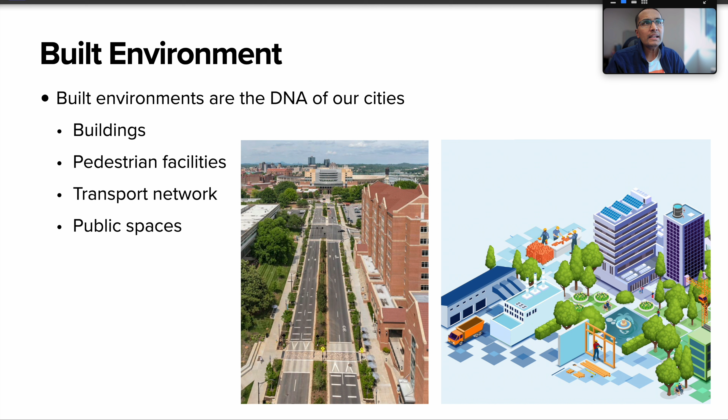They have things like buildings, pedestrian facilities like sidewalks and crosswalks, transportation networks where people switch modes from commuting via foot to getting on a bus or things like that. And in terms of the problem that we're looking at, I'd like to think of this as a multi-stakeholder perspective. There are multiple stakeholders in a built environment, primarily vehicles, pedestrians, and designers and planners.

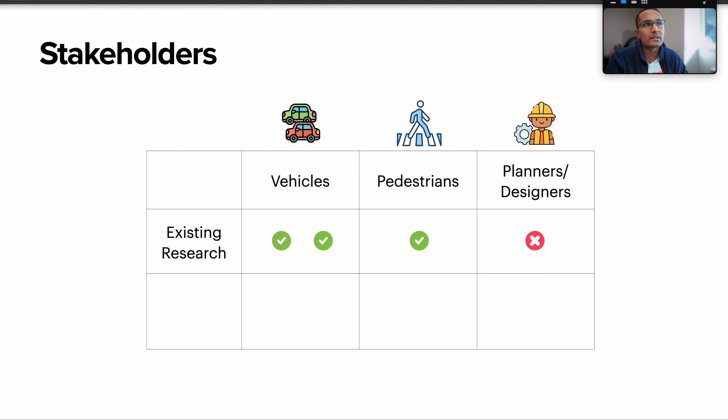If we look at any transportation or even optimization venues, we'll see that existing work mostly focuses on research towards one particular stakeholder, that is vehicles. Every now and then we'll see some work trying to address the problems or optimizations related to pedestrians, whereas it's really hard to find any kind of comprehensive study that targets planners and designers, which are also an important part of the stakeholders in a built environment.

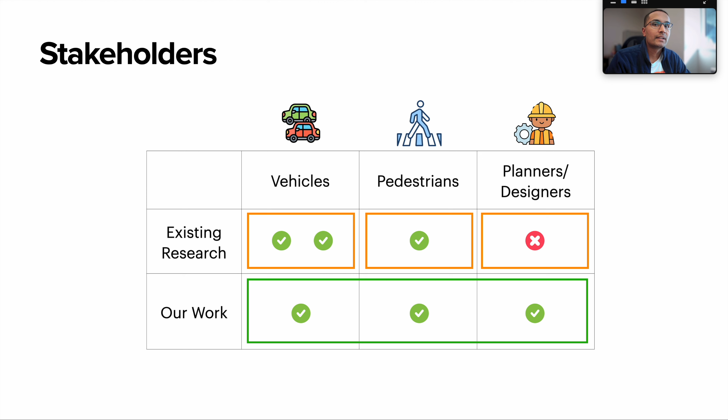The other thing that we observe is that most of the frameworks that exist out there address them independently, as in they are not unified in addressing all the stakeholders in a built environment. What we are trying to do here is address all possible stakeholders in our framework in a unified manner, which does not exist so far. That's our motivation for this work.

In order to better understand how they have different objectives, and those objectives might often be competing, we have to understand how the design and control aspects related to various stakeholders interact, and what the trade-offs are. This is also a motivation behind why we feel the necessity of optimizing these things.

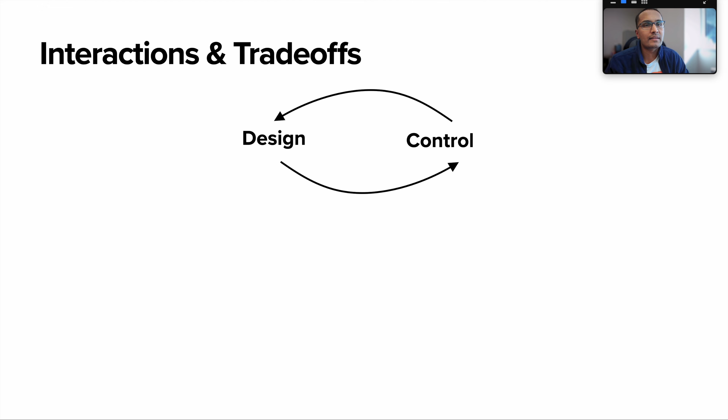So the ideal solution here is to build something like a mid-block crosswalk that would minimize the travel time for the pedestrian, but it would increase the cost of initially building that crosswalk as well as later maintaining it. And in the previous scenario, where the pedestrians had to go all the way to the intersection, it not only increases the travel time of vehicles traveling east-west, because the pedestrians now have to cross, it also affects the travel time of the vehicles going north-south, because now they have to accommodate that pedestrian crossing.

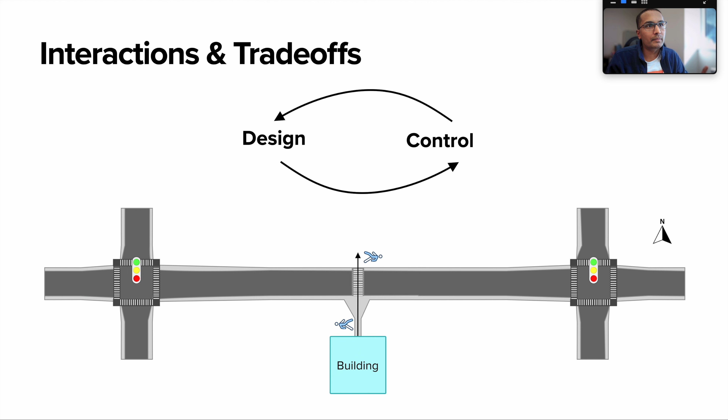Whereas in this setup, although the travel time for pedestrians is reduced, the vehicles now have to make more stops when going from one intersection to the other. So this kind of built environment is inherently an environment with multiple interactions and multiple trade-offs related to both design and control, and these originate from various different stakeholders.

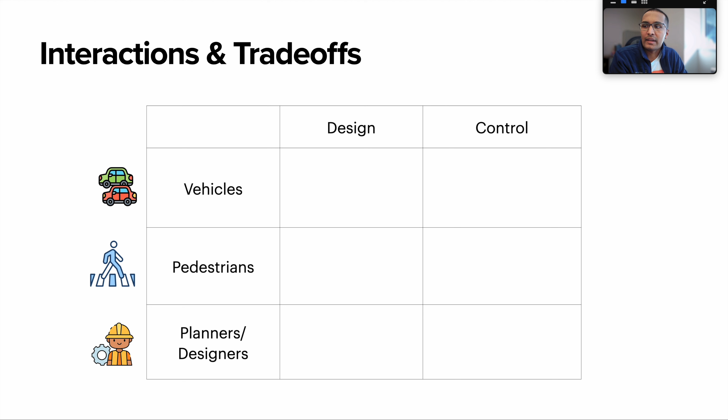So I made a nice little table here to try to see what are the different things that each stakeholder wants to optimize for. And for pedestrians and vehicles, actually safety is the biggest issue. And among other things, safety is also a function of design. There's this crazy statistic that there are almost 20 deaths per day in the United States just because of a pedestrian and vehicle clash, and this highlights kind of a lacking in the infrastructure that we

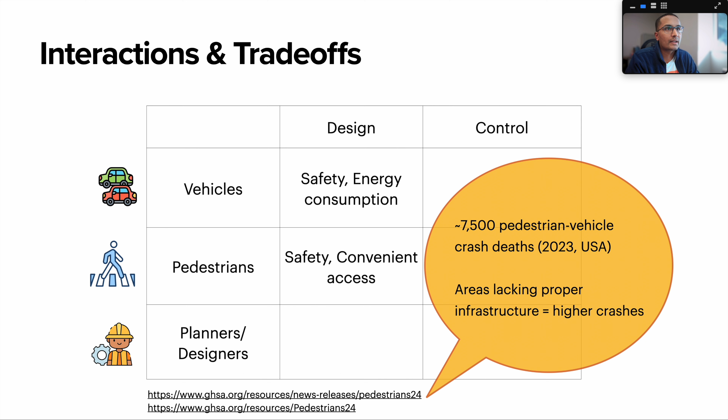have in this country. And for the planners or designers, one of the things that they want to minimize would be cost, whereas other things like reduction of the queue length, reduction of the wait time, reduction of the total travel time. There's sufficient literature out there that has already established the necessity of these things.

And from the control perspective, the designers would want their systems such as traffic lights or signalized crosswalks to be real time and adaptive. For example, we have a big football game here in Knoxville every Saturday where the foot traffic on those days is like 50 times higher than the average day. And we would want our systems to be adaptive in such cases of spikes and peak demands as well.

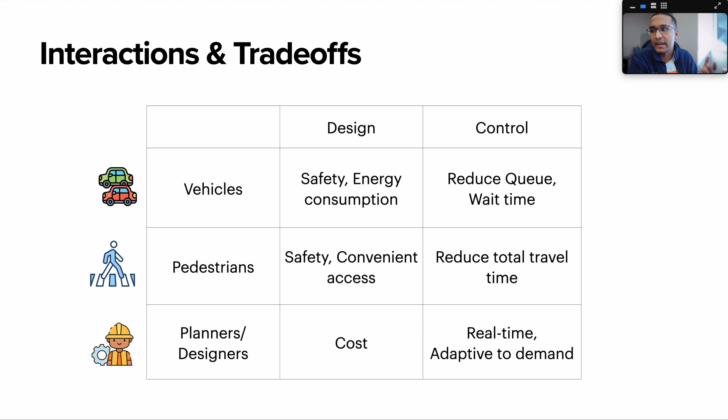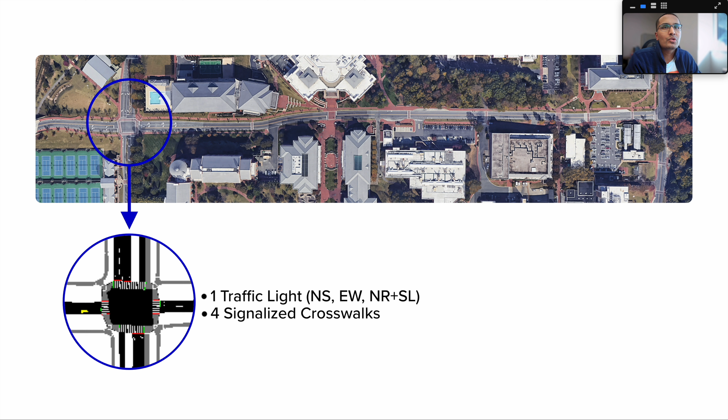And in our specific context, the built environment that we are looking at is the Craver Road at UNCC. And here there exists an intersection at the very left end where there's a traffic light, as well as signalized crosswalks, meaning that people walk up to these crosswalks, wait for a certain time, and then they are serviced where they can cross the crosswalk and go to their destination. And this represents the control elements in our built environment that we are working with.

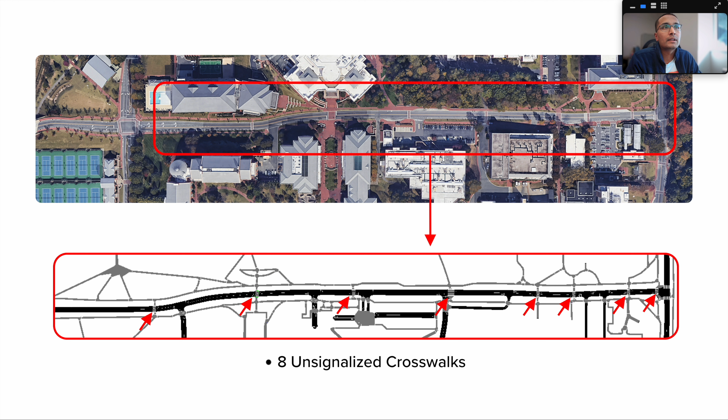Whereas for the design elements, we have 8 different unsignalized crosswalks, and these unsignalized crosswalks mean that neither the pedestrians nor the vehicles are commanded to stop or go. But whenever pedestrians try to cross, the vehicles give them the right of way. And when put together, it looks something like this, where we have a control element all the way to the end, and there are some design elements where these crosswalks, where they are placed, how thick they are, those things also come into play, and they have a certain interaction with each other, like we discussed earlier.

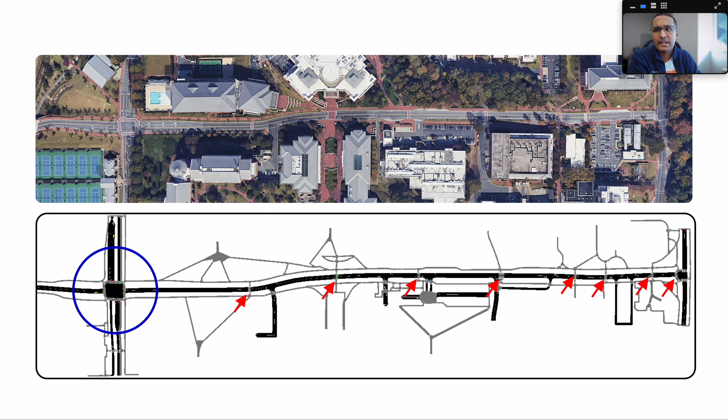And so our initial approach to solving both the design and control using reinforcement learning was to formulate this as a joint optimization problem. And after a certain while, we realized that it was not a good choice to have a single agent solve both design and control, mostly because these two things operate at different time scales. As in, if you have one design, then you'd want to evaluate that design over a prolonged period of time, as well as over various different demands before you learn what to change about that design, right? So inherently, this is a hierarchical structure problem.

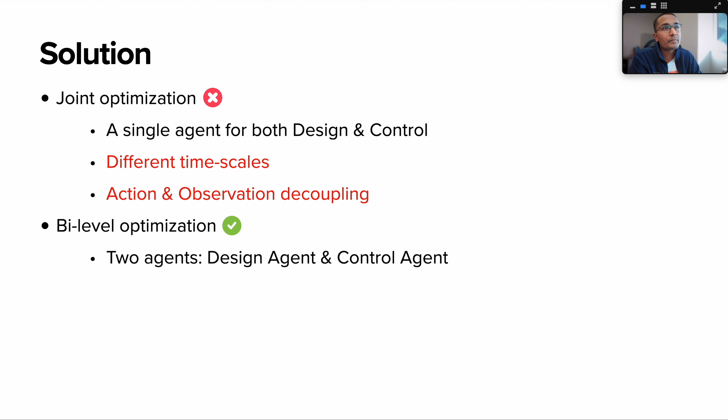And we also had some technical challenges, such as we had to now do things like action and observation decoupling. We have to tell this specific agent that, hey, this is your action and this is your observation, and then things got really hairy after that. So we formulate this problem as a bi-level hierarchical optimization problem where we have a design agent and we have a control agent.

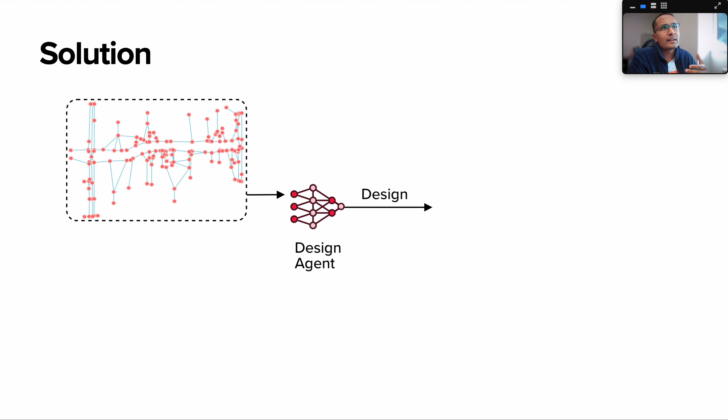And in practice, it looks something like this, where we extract a pedestrian graph network from the existing real world, and then we feed it to the design agent, which proposes a new design iteratively. And then those designs proposed are taken by the control agent, which learns a control policy on the traffic light and the signalized crosswalks. And then based on the performance, they receive their rewards at different time scales. And of course, this is a very high level, 30,000 feet view of how these things work. We can take a little bit more in-depth look, but still not going into the weeds of what are the MDP components and things like that.

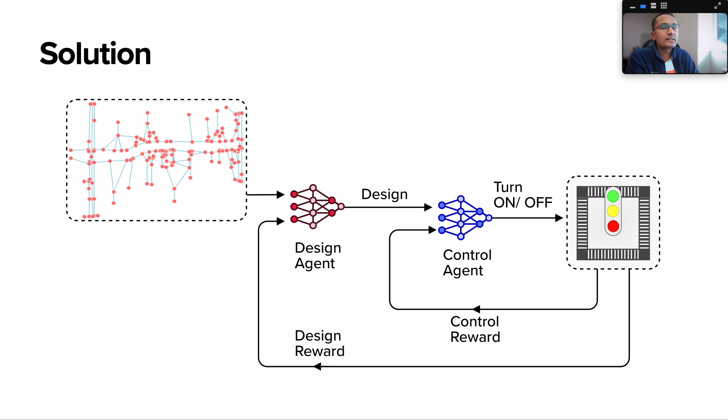So just getting into a little bit more depth, we have a mechanism where the design agent takes the graph, and then it can output a variable number of unsignalized crosswalks, and each unsignalized crosswalk can have its own location along the corridor as well as its own thickness. And this is done by using a Gaussian mixture model, and the location and thickness are also modeled as a joint distribution, and the neural network has a separate head that allows it to also choose how many times it can sample from this Gaussian mixture model.

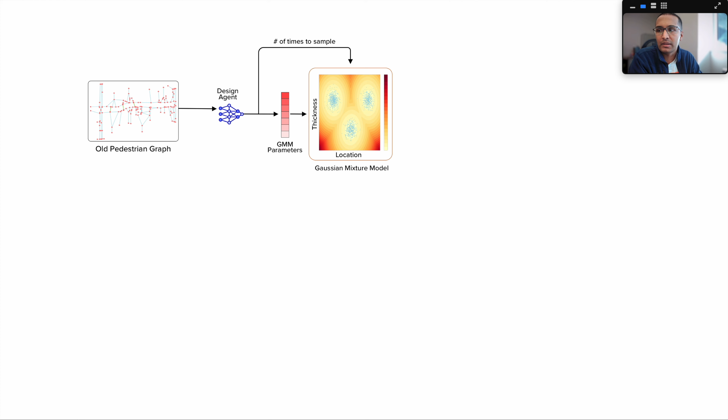And this kind of is a reparameterization trick that we used, because under the standard purview of reinforcement learning, we're kind of forced to have fixed action size and observation size, but we want to give the agent the ability to propose. I mean, if for some reward function the best solution is to propose just one single crosswalk throughout the whole corridor, it has the ability to do that as well. So we wanted to make the agent more general and more flexible in what it can do. Hence, we chose something like that.

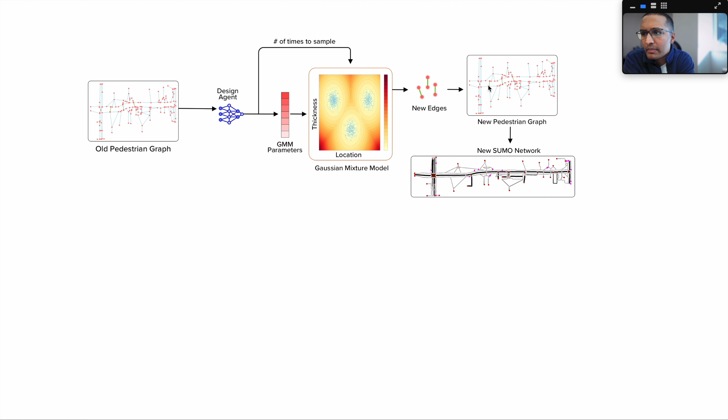And then the agent can propose new edges along the corridor. I don't know how much of it is visible here, but you can see that over here, these green colored ones are the ones that are proposed by the agent. And then we take the pedestrian network graph proposed by the agent, stitch it back with the SUMO network, and then we parallelize those networks across different processors.

And then in each of them, we simulate a different demand. For example, the vehicle demand could be 0.5 times the original demand from the real world, pedestrian could be 3.1 times.

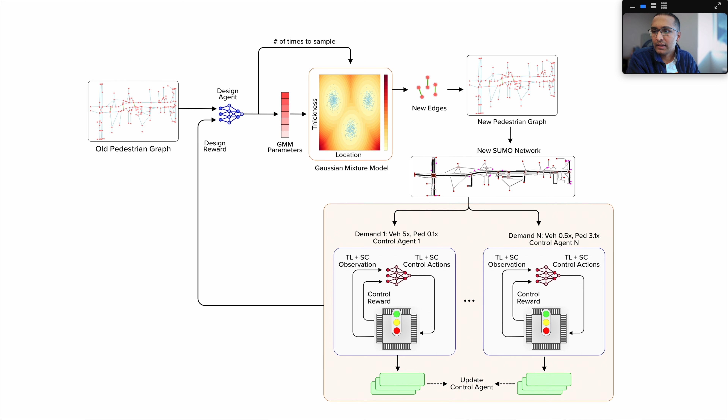And then based on the performance within that same parallelization, the control agent receives its reward, whereas the design agent receives its reward as an average of, for example, things like total travel time across all possible demands. The design agent would then get that reward and propose a new design based on the feedback. And so that was a little bit more into the depth.

So coming back again to the hypothesis of why I expect this to work and why we think this is a good approach to this problem: fundamentally, design decisions on these built environments have traditionally been made in a heuristic way. Traffic engineers and urban planners use established heuristics, such as the distance from an intersection for a crosswalk should be 150 meters, and the distance between two consecutive crosswalks should be 100 meters, heuristics like that.

And such desire lines, and where pedestrians accumulate and generate, may not be directly obvious to the designer during the design time. They can only be known when things are actually occurring in the real world.

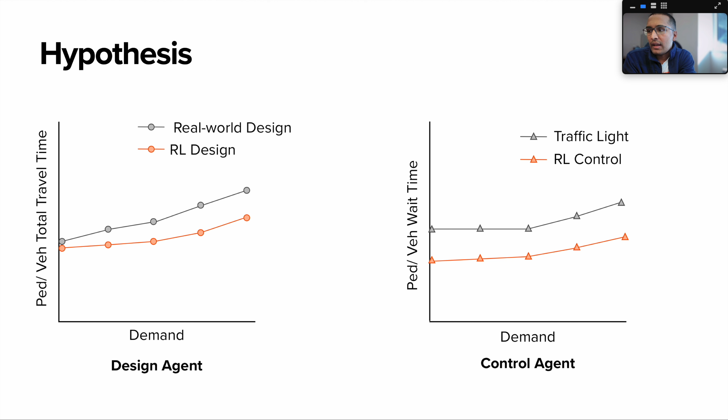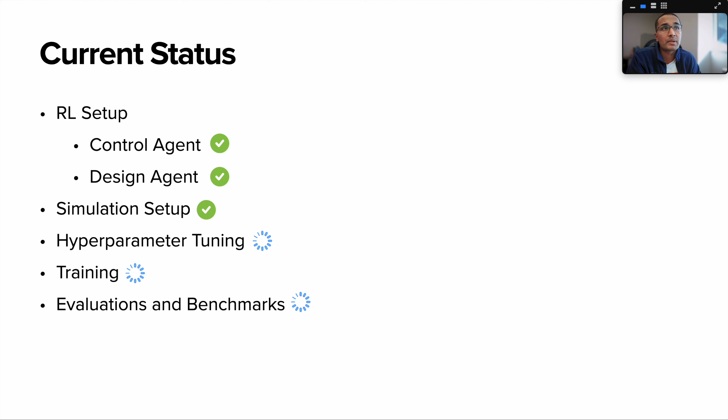In terms of the current status of the project, we have the control agent setup complete. We have the design agent setup complete, as well as the simulation setup where all the actions have to be applied, and all the graphs have to be handled and passed along. We have all those things complete, and currently we're looking at hyperparameter tuning, and shortly we'll begin our main training. And that's it for the presentation.